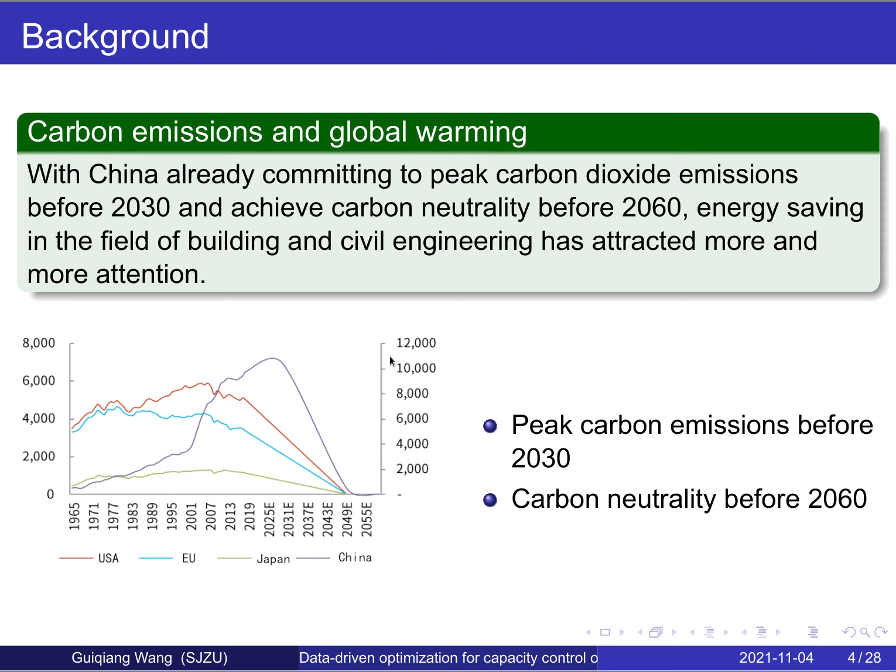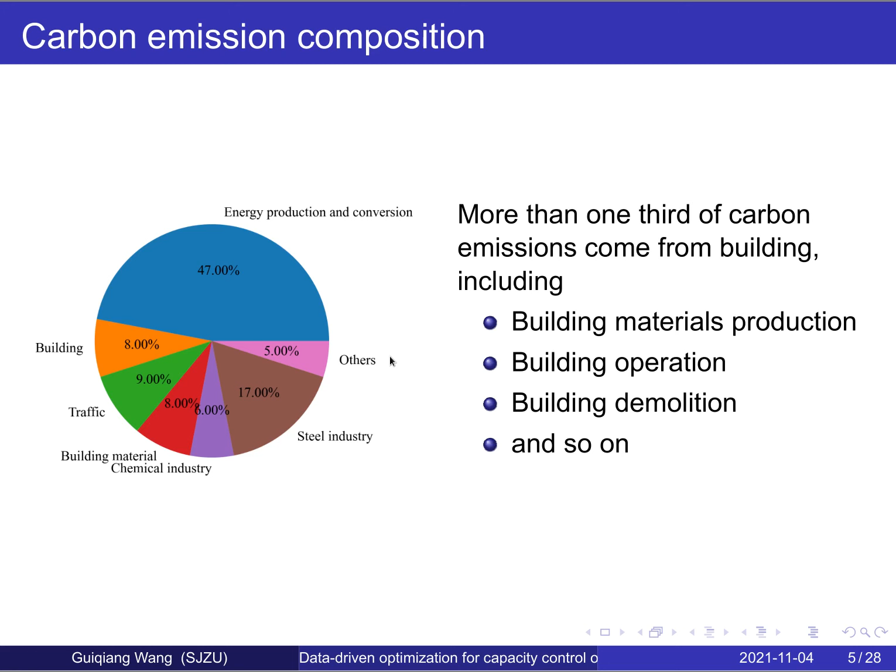This diagram shows the carbon emission composition at present in China. We can see the component for building operation and also the component for building material production. We also have to notice that for the component of energy production and conversion, there is also a large share related to the building field. So we can conclude that more than one third of carbon emissions come from the building field, including building materials production, building operation, and building demolition, and so on.

Some investigation has pointed out that carbon emission can be very different at different areas in China. For example, in northern China, the carbon emission intensity is 54.7 kg per square meter, but in southern China, that number is only 17.4 kg per square meter. The reason for that difference is the existence of the central heating system in northern China, because the weather is cold there, and in winter we have to provide hot water into the building to maintain the room at a comfortable stage. In southern China, we don't have to do that.

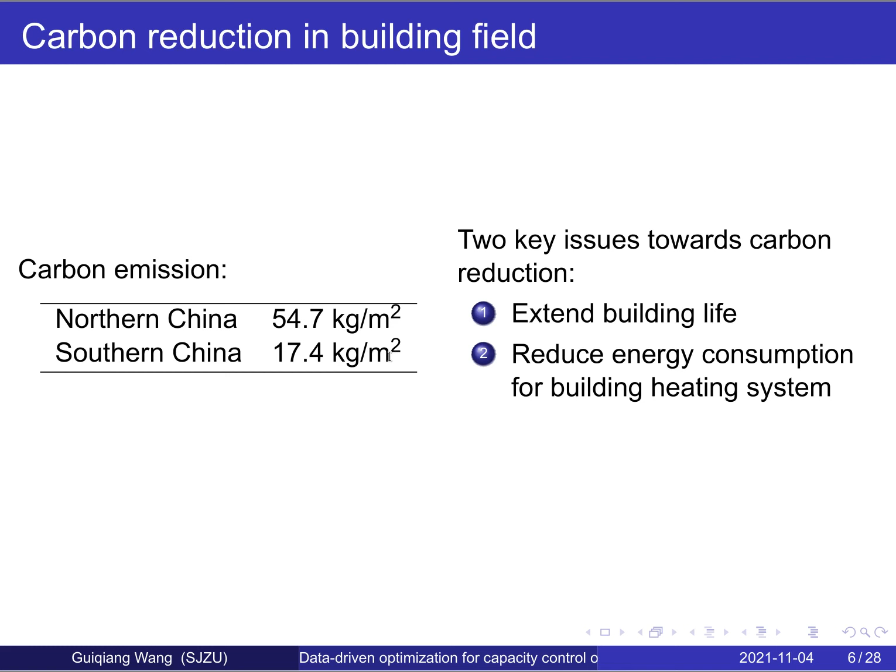So here we concluded two key issues towards carbon reduction. First, we have to extend the building life in the future, maybe 50 years at least. Second, we have to reduce energy consumption for building heating systems. To achieve that goal, over the past decades there has been a rapid rise in the development of ground source heat pump systems due to their advantages in energy efficiency and carbon dioxide emission reduction.

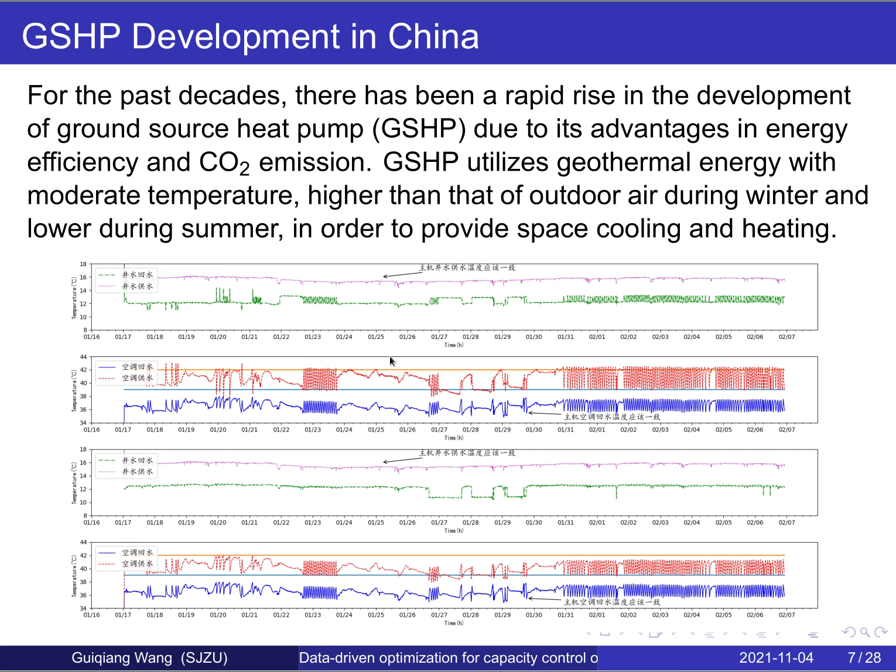GSHP systems utilize geothermal energy with moderate temperature, which is higher than outdoor air during winter and lower during summer, in order to provide space cooling and heating. This diagram shows some measurement results we have done in the GSHP system on our campus. From this diagram, we can see that the temperature of underground water is around 16 degrees Celsius, even on the coldest day in winter, and the underground water temperature is rather stable, which is beneficial for the operation of the GSHP system.

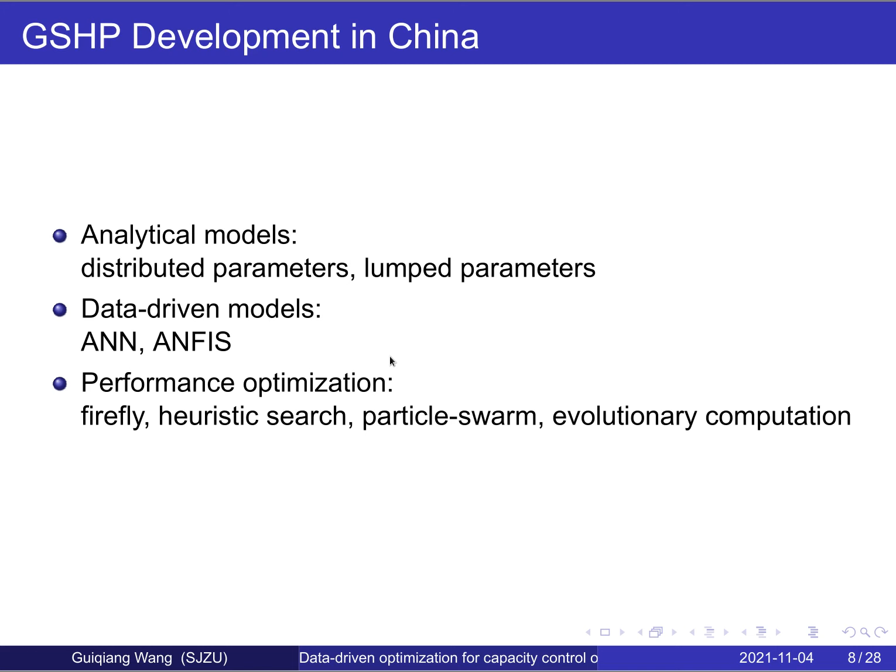People have done a lot of work on GSHP systems, like analytical models and data-driven models they have developed and used in performance optimization. Those performance optimization problems can be solved using methods like firefly algorithm or particle swarm algorithm, etc. In this research, we have explored the use of data-driven models in the optimization of GSHP systems. First, we collected some experimental data at predefined working conditions in the heating season.

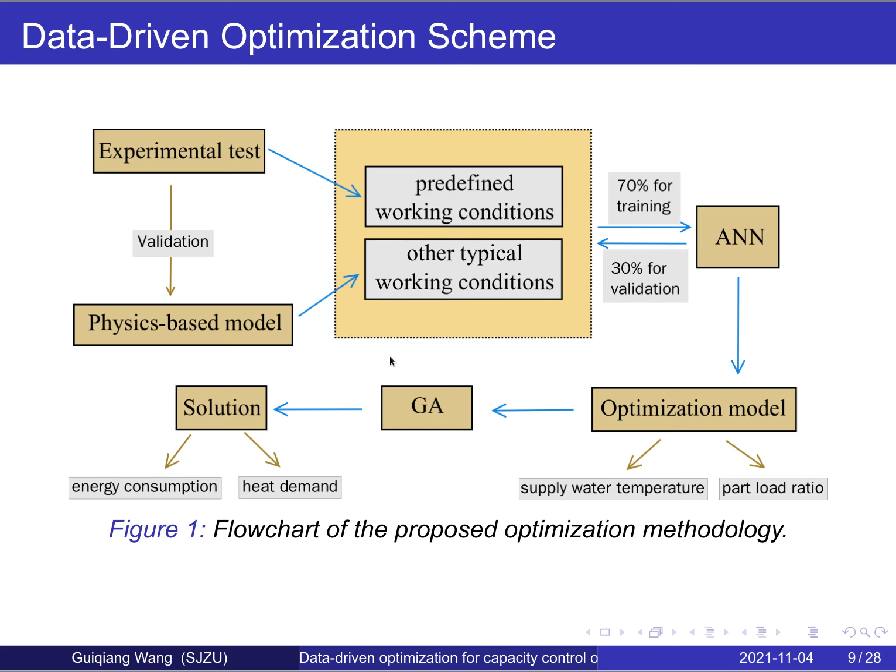Those experimental data were used to validate a physics-based model, and then used to expand our data coverage. All of the data sets were fed into an artificial neural network for validation and training. The well-trained ANN model was used to formulate the performance optimization model, in which we selected the supply water temperature and part load ratio as the control variables. The optimization problem was then solved using a genetic algorithm, which leads to our final solution. The final solution suggests an optimal operation strategy, which minimizes energy consumption without compromising user comfort. This diagram shows the flowchart of the proposed optimization methodology.

Next I'm going to introduce something about the building and the system. The test building has an area of 10,997 square meters with 5 floors and is located in the severe cold climate region of northern China. It is dominated by heating loads. For this test building, we have 5 water wells to supply underground water for the GSHP system. The GSHP system consists of 2 ground source heat pumps and 2 underground water pumps, which are used to circulate the underground water between the water wells and the GSHP system.

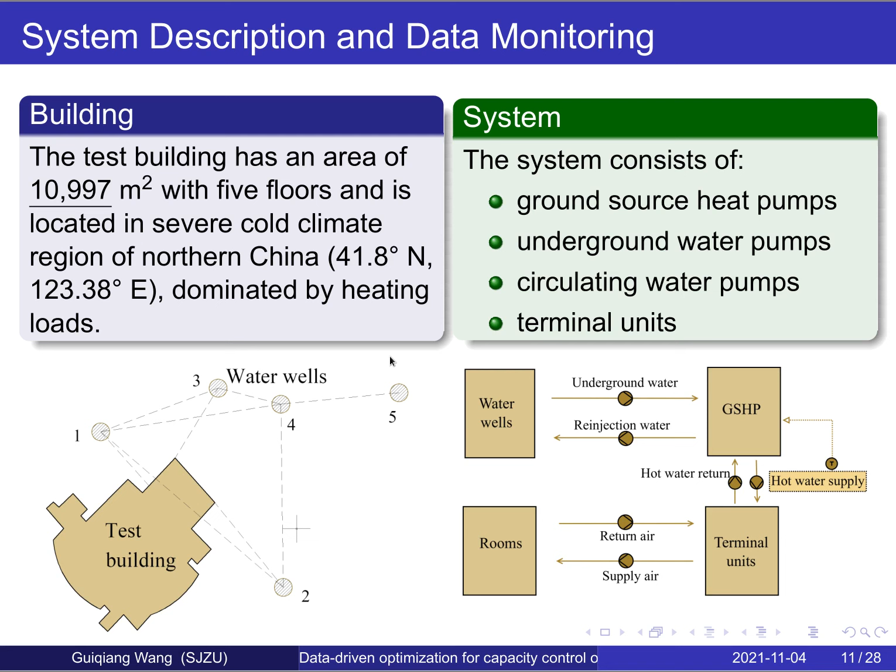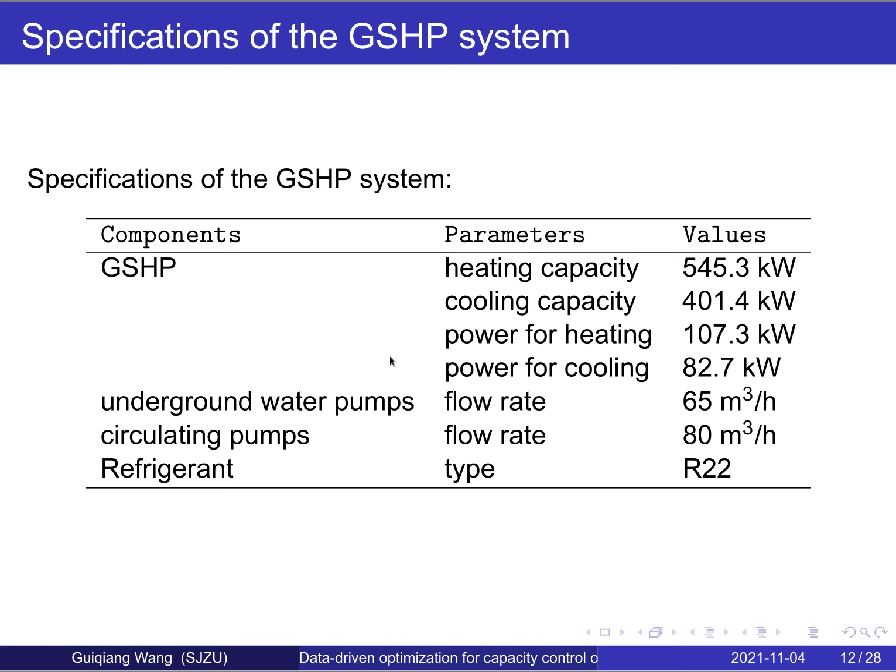First we constructed an artificial neural network model. We selected the temperature and flow rate at the inlet of the condenser and the evaporator of the GSHP system as input parameters, and also selected the part load ratio, PLR, as another input parameter. All of the input parameters form our input layer. Between the input layer and the output layer, we have set up 8 layers of neural network as hidden layers. The output layer includes the heat exchange at the condenser and the evaporator, and also the energy consumption of the heat pump.

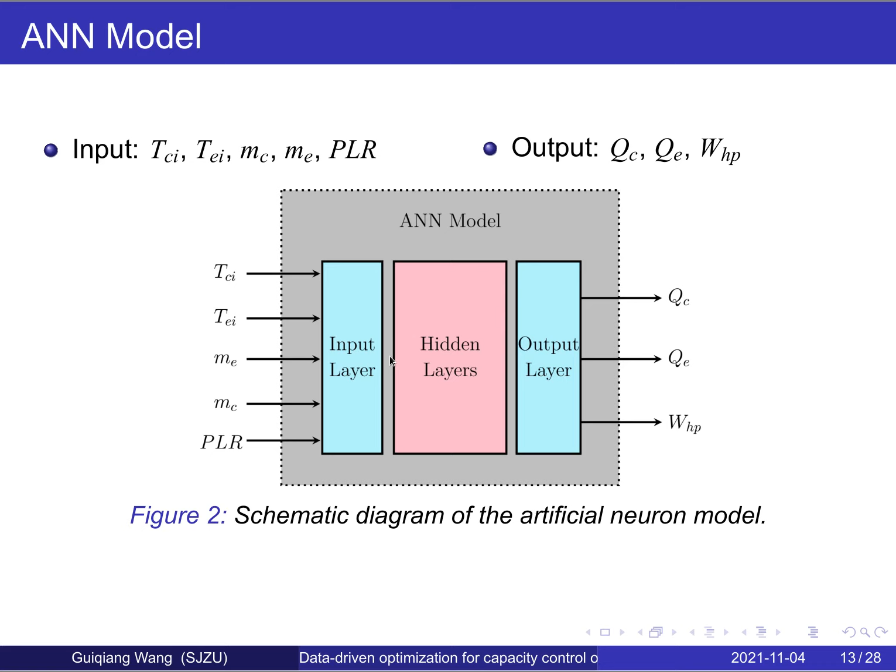We also employed a detailed model to expand our data coverage. The detailed model is described by some governing equations, including the mass conservation and energy conservation for refrigerants, the secondary fluid, and the tube wall.

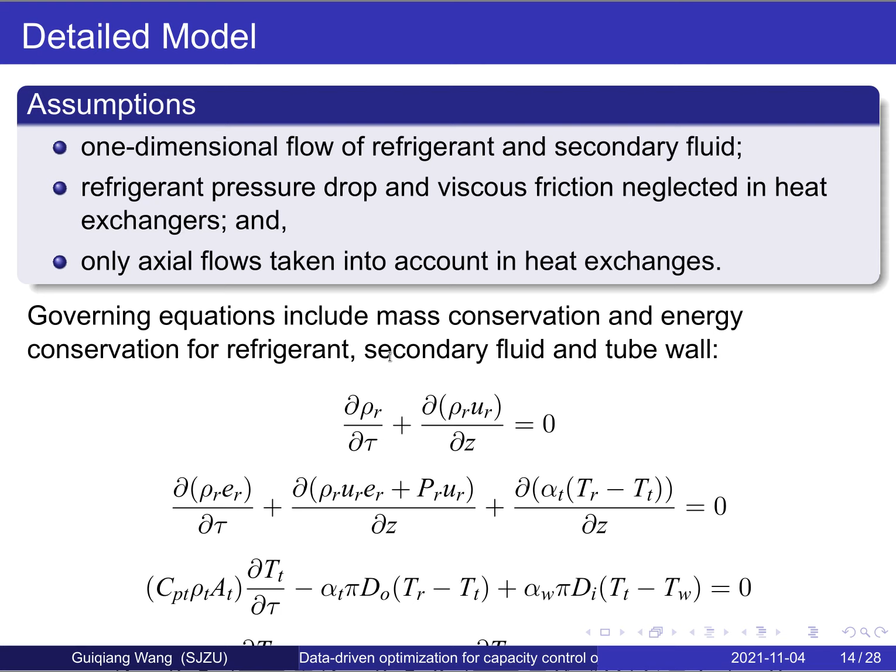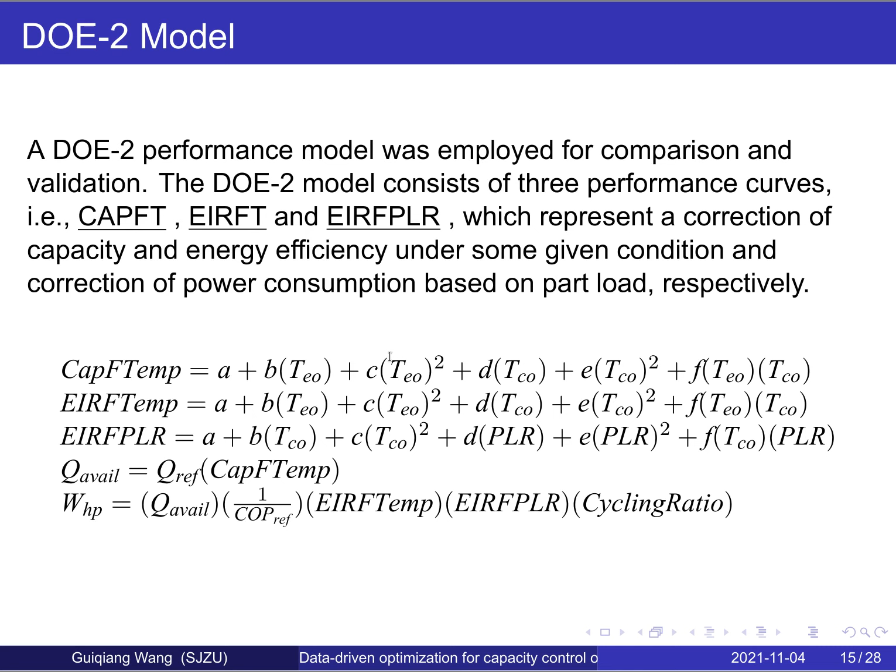The DOE2 performance model was employed for comparison and validation. The DOE2 model consists of 3 performance curves, which represent a correction of capacity and energy efficiency under some given condition, and correction of power consumption based on part load ratio, respectively.

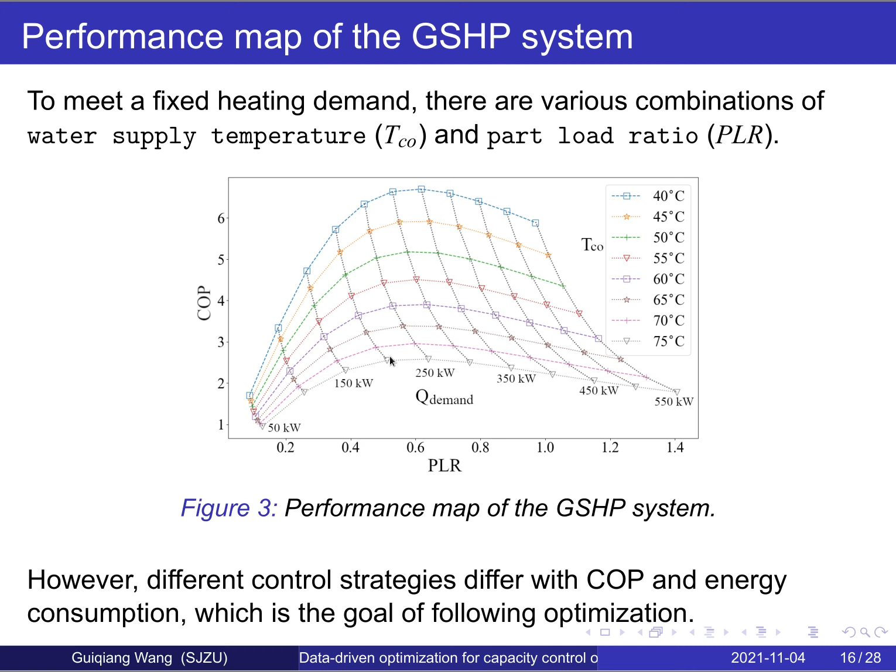From the DOE2 model, we get the performance map of the GSHP system as shown in the following diagram. From this diagram, we can see that to meet a fixed heating demand, there are various combinations of water supply temperature and part load ratio. However, different control strategies differ in COP and energy consumption, which is the goal of the following optimization.

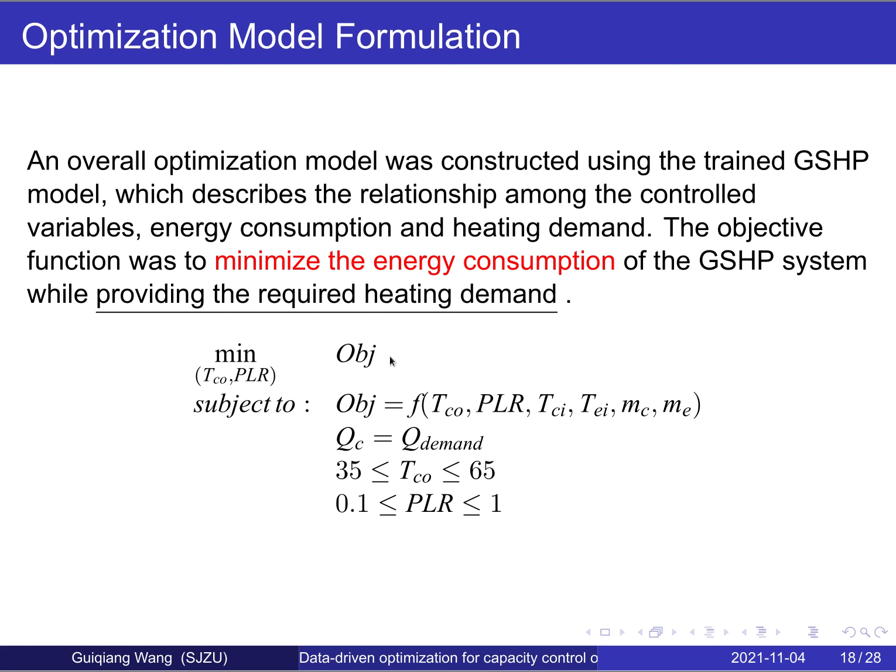So next is our optimization formulation and solving. An overall optimization model was constructed using the trained GSHP model, which describes the relationship among the control variables, energy consumption, and heating demand. The objective function was to minimize the energy consumption of the GSHP system while providing the required heating demand.

We also selected 2 control variables: the water supply temperature and the GSHP staging. For the water supply temperature, lower temperature leads to higher COP of the system while providing the same amount of heating. However, the temperature range of the supply water is restricted by the load capacity and operation mode of the indoor terminal units. So we constructed another EnergyPlus model of the building, including the HVAC system, to evaluate the supply water temperature range related to heating demand.

For the GSHP staging, if it is a fixed speed compressor, capacity control can be done by regulating slide valve position in the suction area to adjust the amount of refrigerant being compressed. On the basis of operation mode, the capacity control can be either continuous, from 10% to 100%, or staged, with only several specific slide valve positions like 25% or 50%, etc.

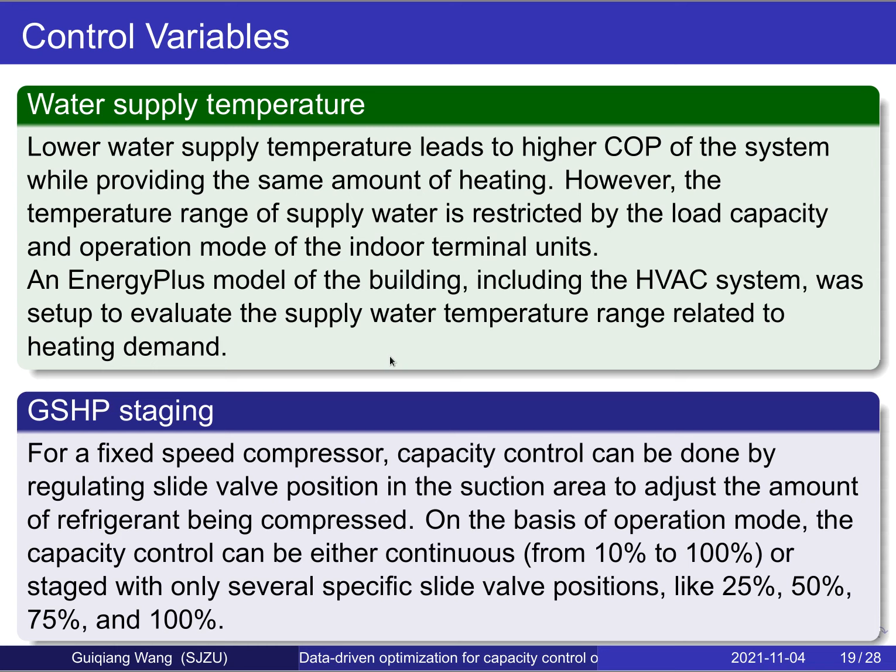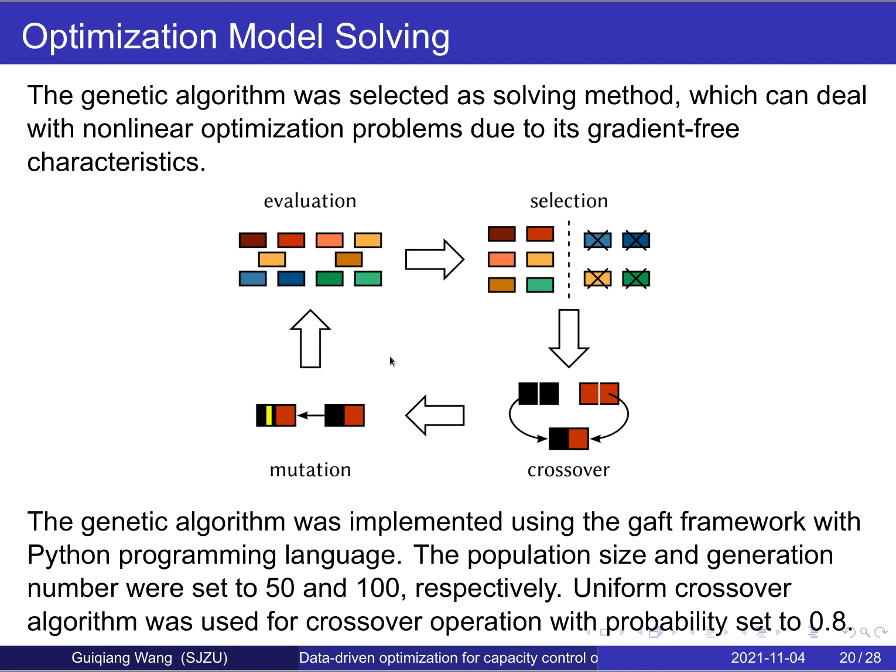We use the genetic algorithm to solve this optimization model, which can deal with nonlinear optimization problems due to its gradient-free characteristics. The genetic algorithm includes 4 processes: evaluation, selection, crossover, and mutation. It was implemented using the GAFT framework with Python programming language.

After solving the optimization problem, we get our final result. First, we compare the experimental data with our model prediction. The results of the ANN model and DOE2 model were both in good agreement with the experimental results. Due to its more complex structure and better generalization ability, the ANN model presents better performance in capturing the system characteristics than the DOE2 model.

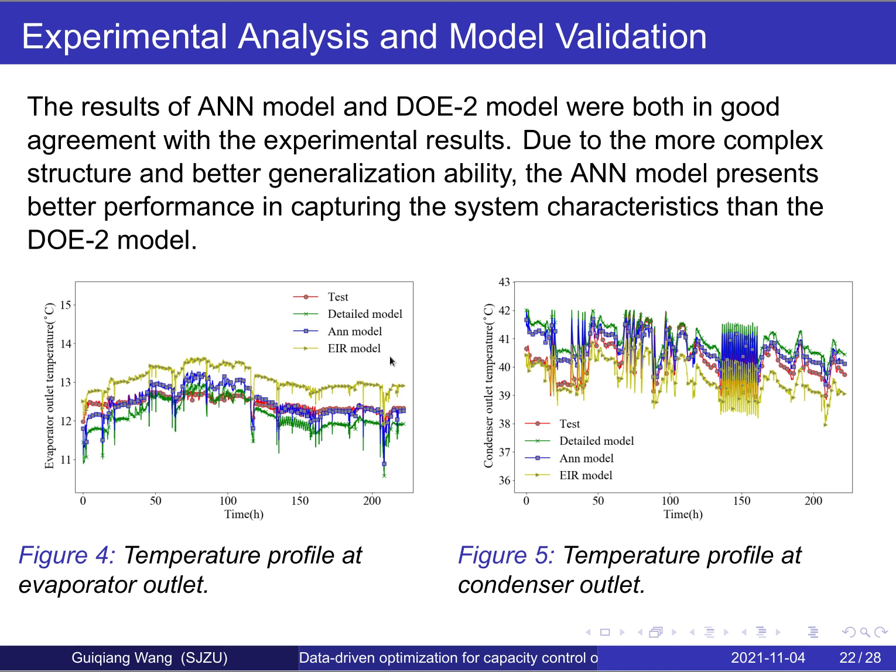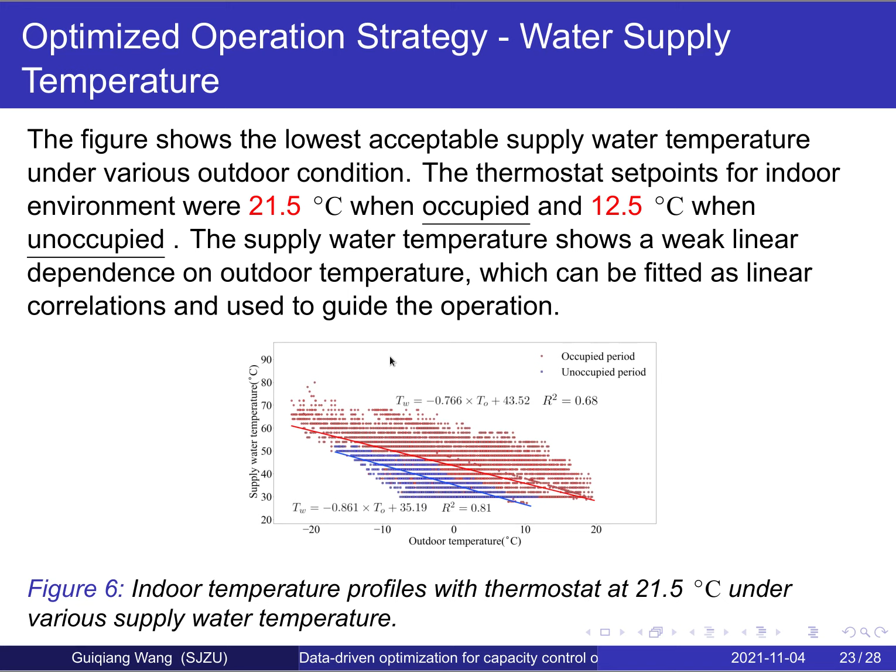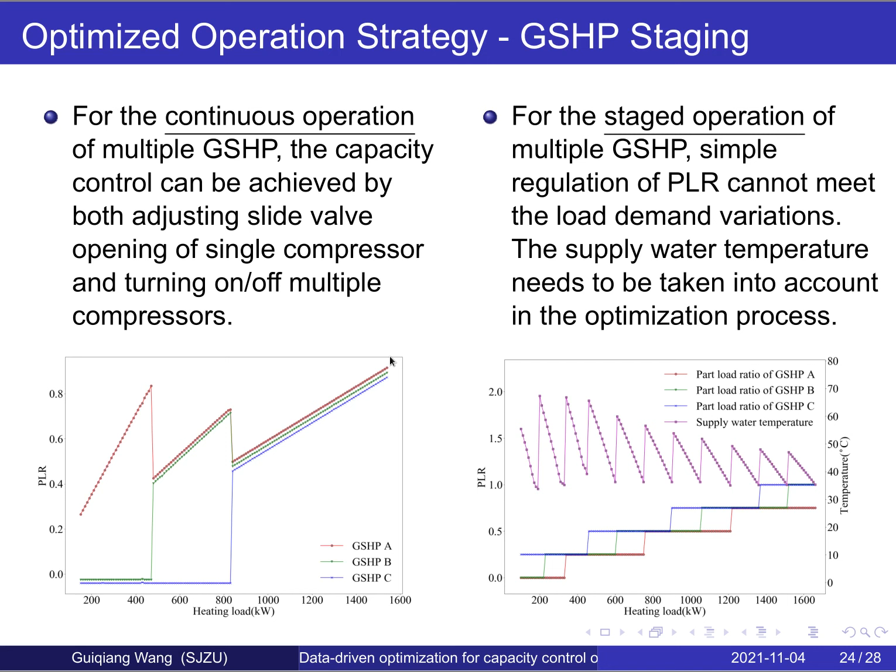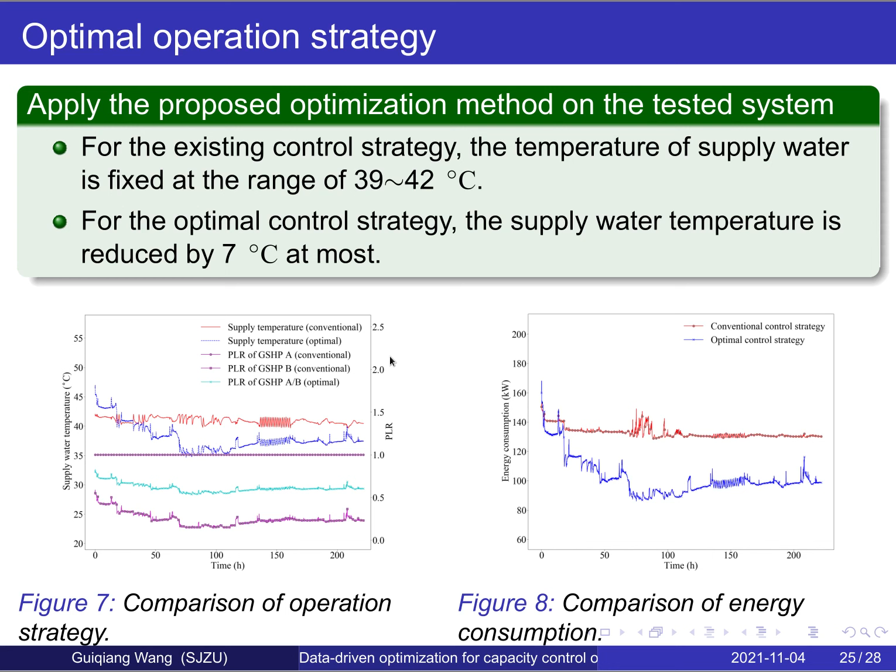After we applied the proposed optimization method on the tested system, we get the results for the operation strategy and the energy consumption. For the existing control strategy, the temperature of the supply water is fixed at the range of 39 to 42 degrees Celsius. But for the optimal control strategy, the supply water temperature is reduced by 7 degrees Celsius at most.

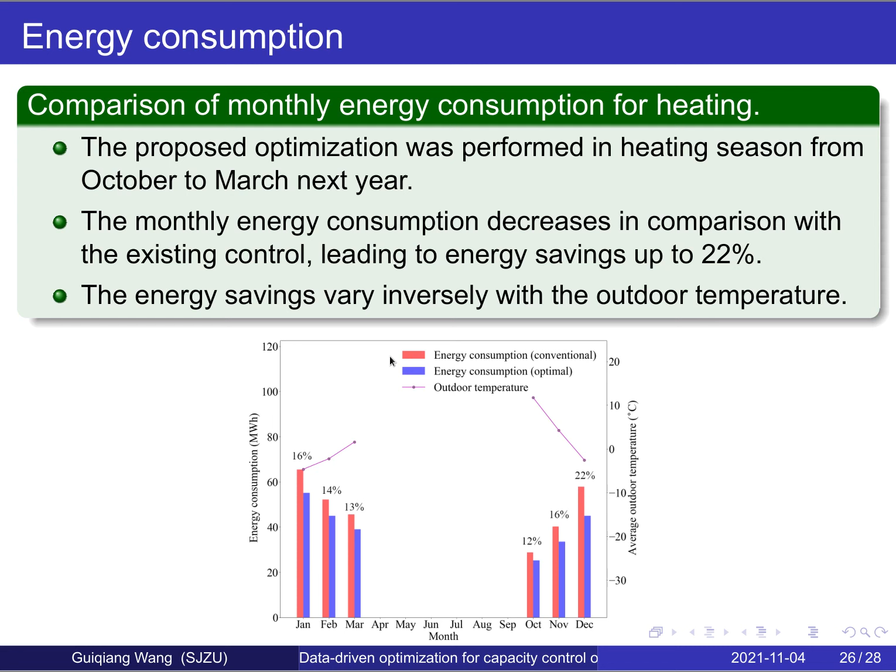So finally we get our conclusion. In this research, a data-driven optimization of GSHP system with data supplement and thermal comfort constraints was proposed and implemented in order to save energy consumption while providing required heating demand. An artificial neural network approach was employed as the model of GSHP and trained with expanded datasets. Genetic algorithm was implemented as the solution method of the proposed optimization model.

The optimization results indicated that the optimal strategy can provide energy saving of 12% with variation depending on load conditions. At the optimal operation strategy, maximum energy savings were achieved at high load conditions. Energy performance analysis revealed that the supply water temperature and part load ratio both played an important role in affecting the heating output and energy consumption.